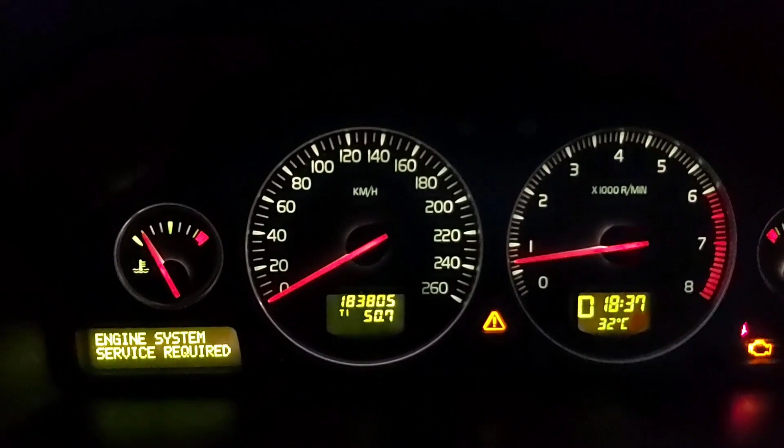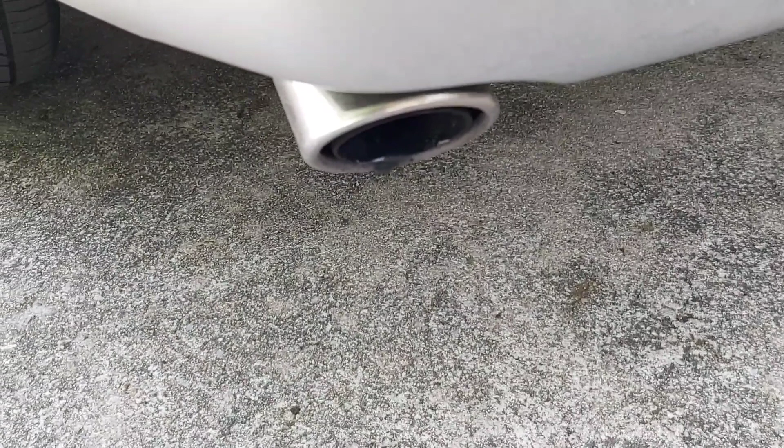Okay, so a new symptom: cold. When you put the car in drive, it's now surging. You can hear it doing it now - when it goes, you can hear a solenoid click. I don't know if it's a cold start issue or not, but if it does it again, wait and see. You hear a click and then it'll hunt really bad, very audible. Boom, boom. There.

Hey guys, on today's episode of Thailand Retro Mods, we're dyno tuning the Moose Wagon. Time for a tune, time to see if we can unlock some power. This episode we're going to walk you through the diagnostic process we undertook, and why we're going for a tune already - we're kind of jumping ahead of ourselves, but there's a good reason. We've checked out a few other things. We've got a tune from Hilton in the USA, so we're going to go over that tune and the process. First, we're taking it to the dyno cell to get a baseline run, to see what it's currently putting down before we upload the tune, and see how much more moose we can unlock out of this thing.

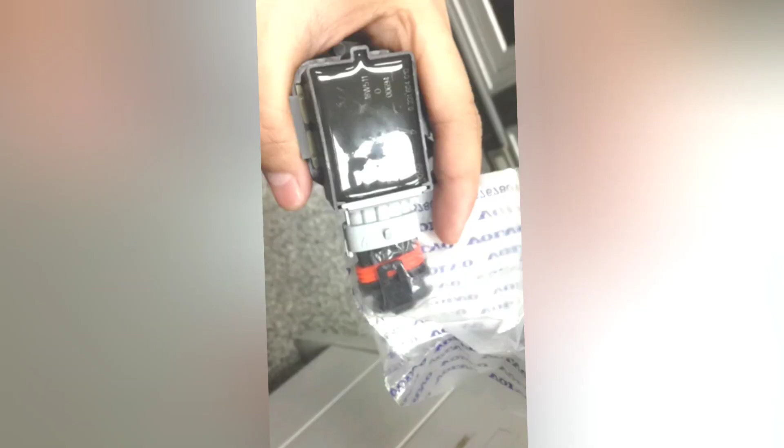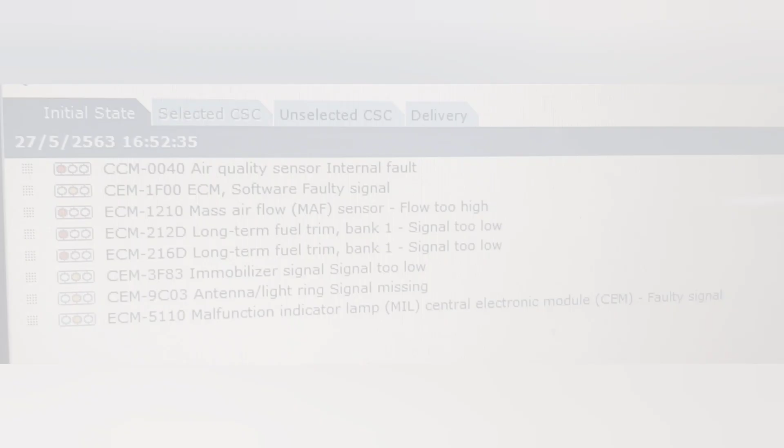Okay, so at this stage I've bought the car. We've done a lot of stuff to it - changed the timing belt, changed the coils, changed the plugs, changed the plug connectors, even changed the MAF, and changed the oil and everything. We're getting it ready, but the problem is the car just does not behave right. It's got some pretty significant symptoms. It feels very underpowered, the gearbox just isn't happy, it doesn't want to change gears. I thought it was the oil, but it's not the oil. Under wide open throttle, it gets up to redline, it goes up, up, up, up, up, up, before it changes gears. It's just behaving like a general dog.

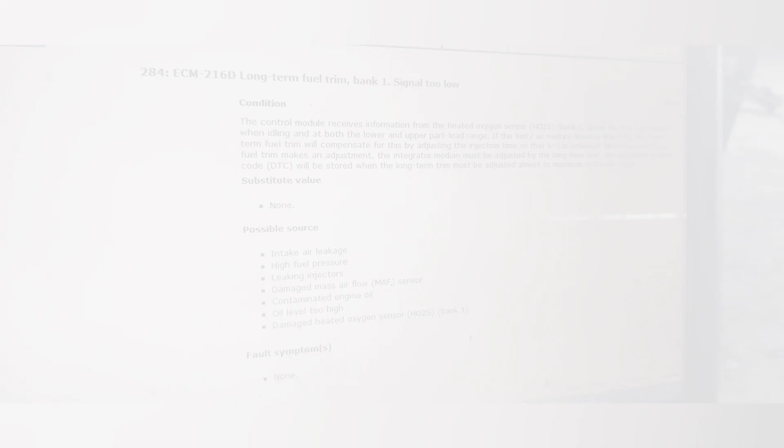The symptoms we've got in the car showing us is a long-term fuel trim, which is typical of a vacuum or air leak behind the MAF. It's also showing us a MAF error itself, and it's showing us an ECU error too, which means it's had a tune before - so that's interesting.

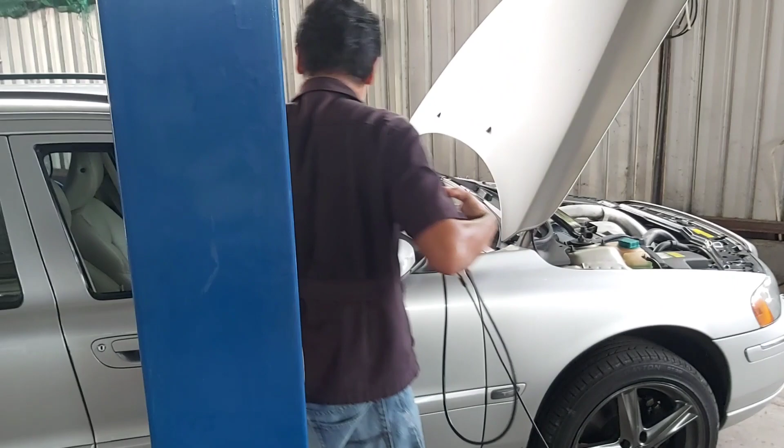And so we picked the video back up at the workshop, and now you get to see the troubleshooting process. Noom is such a legend - he's actually gone and downloaded the VIDA software in English for me so that I can read the codes as well.

So yeah, we were getting all the codes up, but there was a lot of garbled text on the screen - unfortunately my spoken Thai is not even as bad as my reading and writing of Thai, so thank God he's got it in English, so we're going to see what it is.

The problem presenting at the moment could just be a bad board - the body control module talking to the ECU. What we've found is it seems to be an intermittent fault, which is kind of positive, because that could mean it's a connector or something on the board that can be replaced and fixed - so that could be good.

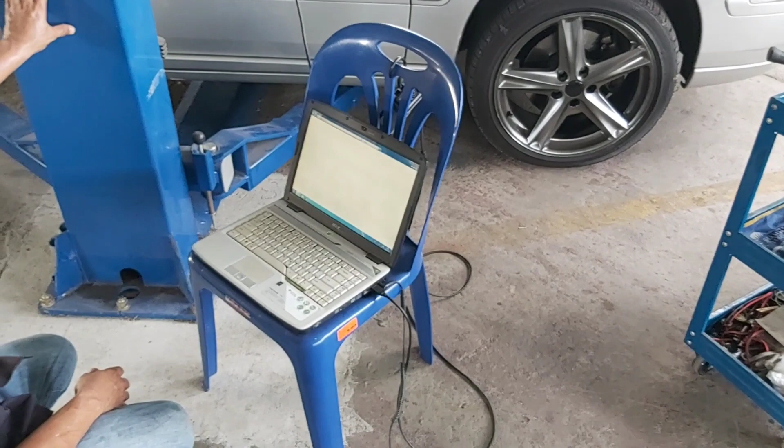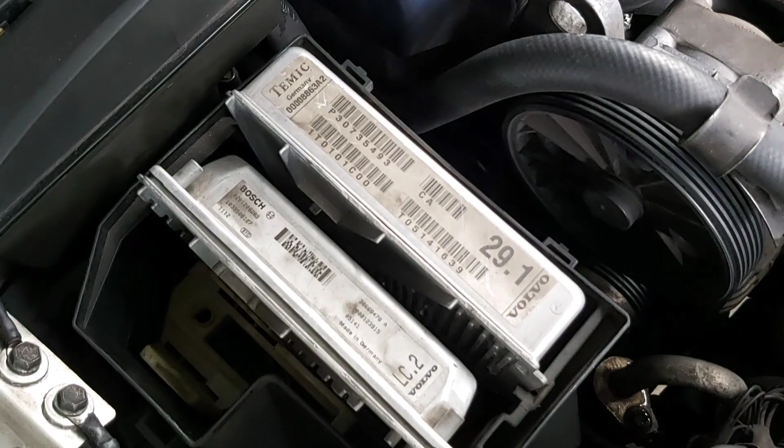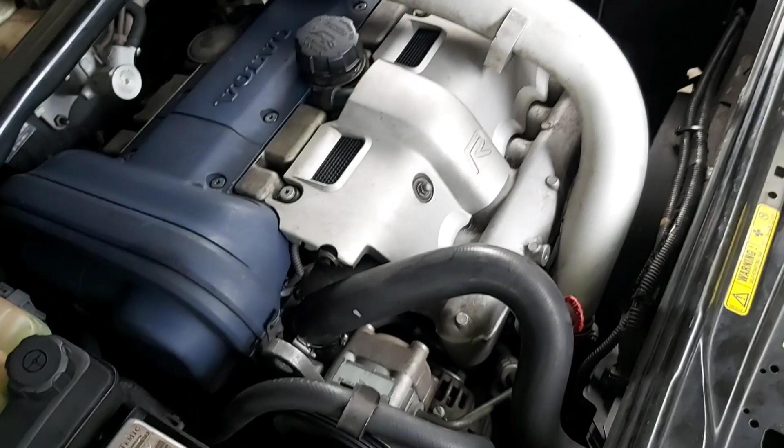The ultimate bad news would be that there's a disconnect between the ECU for the car - so the ECU in the car here. We've got the V70R engine, which is what we want, and the ECU which obviously runs that. We've got the original ECU for the shitty automatic gearbox, which could be causing problems. And then it runs into the BCU, which is under the dashboard, which then goes out and controls all the other stuff like the ABS and all that.

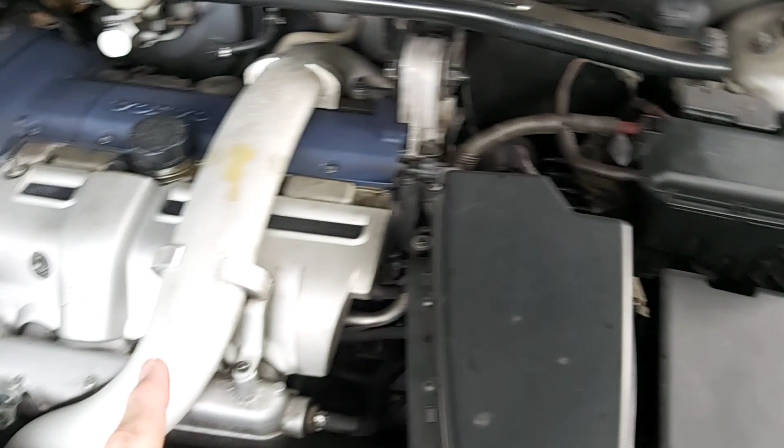The worst case scenario for this car is that it's going to be like an ABS-type fault, where this engine, that computer, the gearbox - they just don't talk to each other and are never gonna talk to each other without special VIN numbers or whatever from Volvo. If that's the case, then we're up the creek without a paddle. So fingers crossed at this moment that it all comes together.

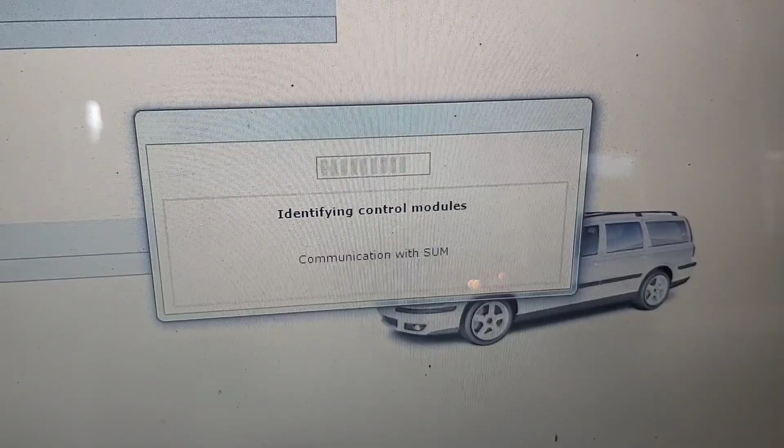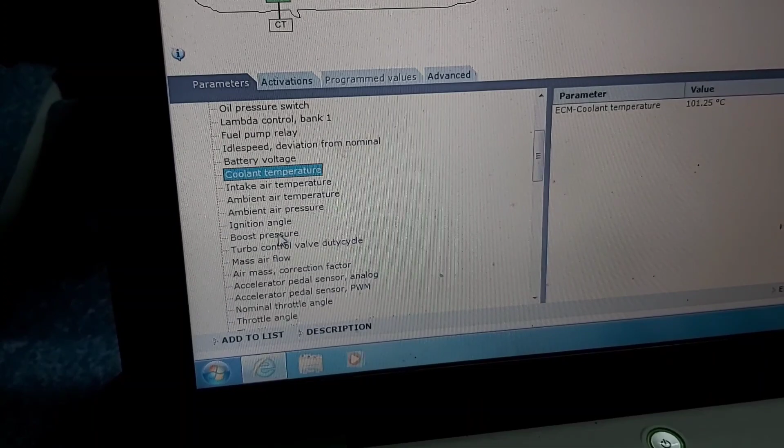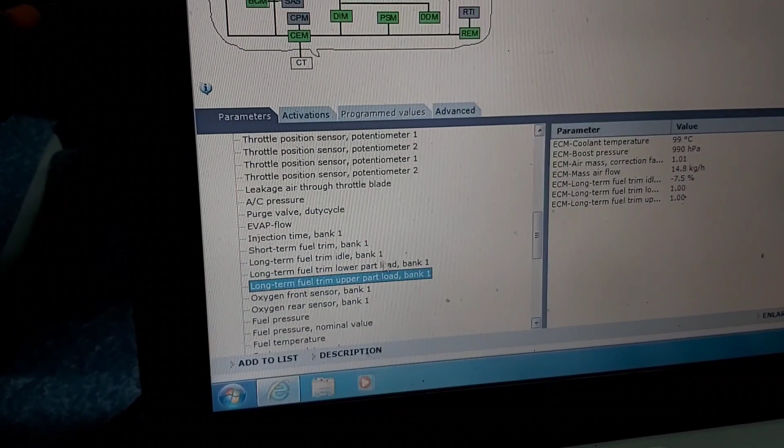So the cool thing about the VIDA software is you can go in and select parameters you want: coolant temperature, boost pressure, whatever you need, airflow mass correction, mass airflow we definitely want. We also want to throw in the long-term fuel trim, lower part, long-term fuel trim upper part load. That's one of the main ones we want. I was also worrying about the fuel pressure, because it could be the fuel pressure sensor as well, and this will give us all the immediate readings.

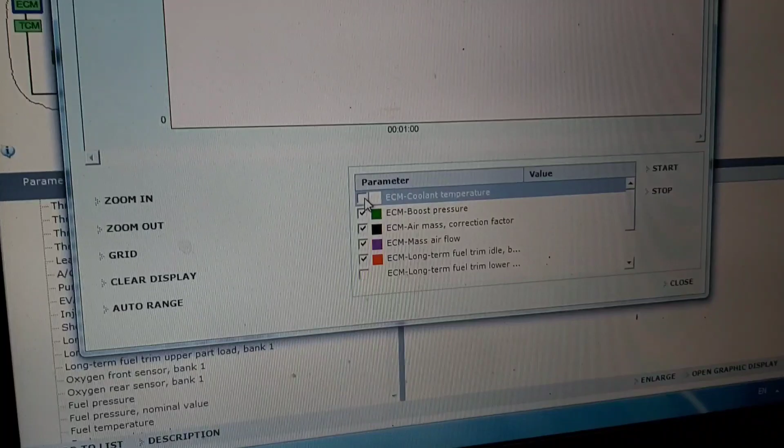Then you can actually go to open graphic display. You can pick 5 of the parameters. In this case, we're going to want to select the mass airflow, the long-term fuel trims are the main things we want because those are what were coming up with the errors, and the oxygen sensor. We can only pick 5, so we'll pick the front, the rear, and that. So start there, and then as you see, it starts to give you the live readings.

So the oxygen sensor is one of the ones that we were worrying about. Fuel trim seems pretty good now. I've noticed that the long-term fuel trim has gone back to -7.5, which is the maximum down, which is what we don't want to see. So there could still be some fuel trimming issues going on there.

A little bit of slack cable.

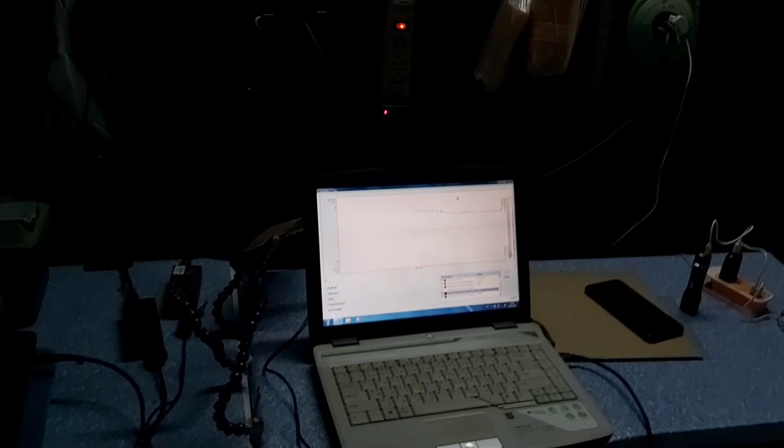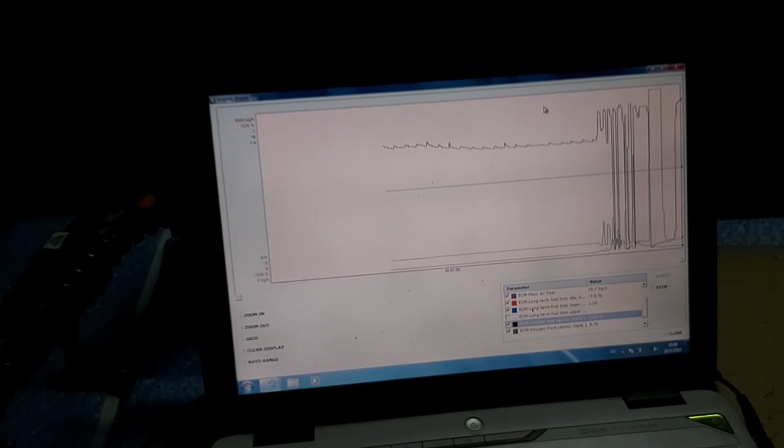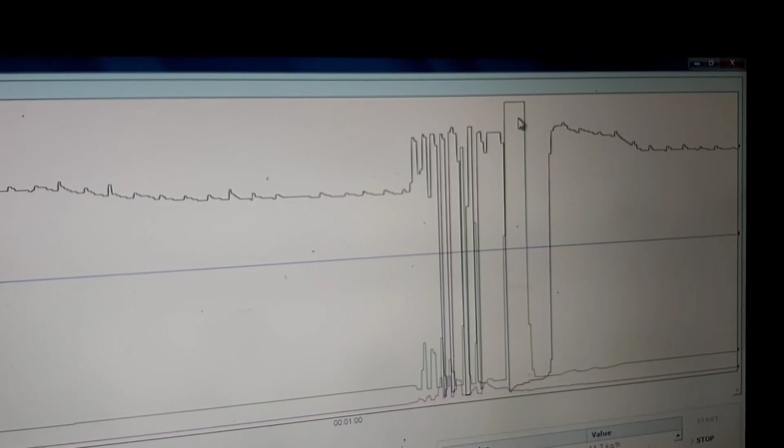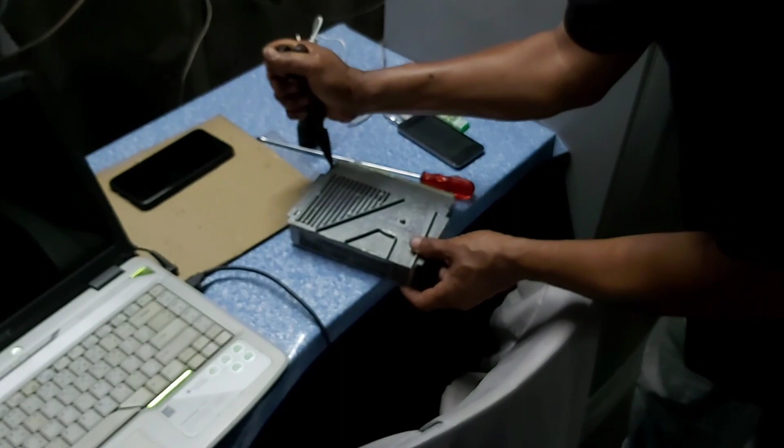Now, the last departing gift that the workshop in Bangkok left me with was going, something wrong with your gearbox, and it's probably going to be very expensive to fix. So Kun Noom, this is his wheelhouse for sure. He's got all the setup and everything for it, definitely knows what he's doing. So he's going to have a look at the transistors for me and see if he can get them fixed, because this could also be another one of the problems.

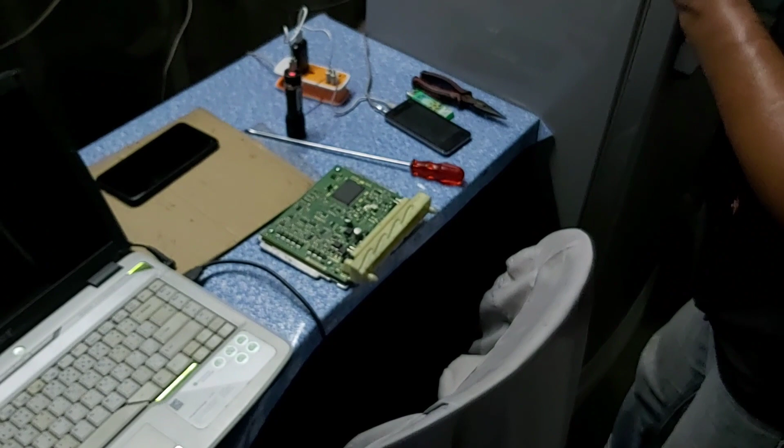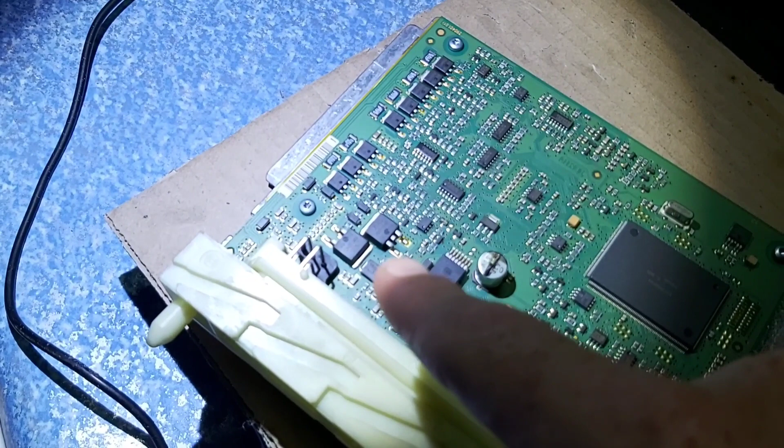I noticed under full load, wide open throttle, it was not wanting to change gear either. I'm sure this gearbox isn't long for the world, but let's see if we can give it a decent send-off at least. So there are a couple modules here which we can get the part numbers from and order. Thailand being a very hot and humid country, these might have just gotten hot inside the engine bay and cooked, so we're going to have a crack at seeing if we can order these and replace them. So we've found the part numbers for the 2 transistors there, and we're going to order some on eBay and then chuck them out and chuck them in and see if we'll fix the problem.

Now, just got back from the mechanics and my car's making this funny squeak. Can anyone else hear that? So I found my mystery squeak in the car. That'll do it every time.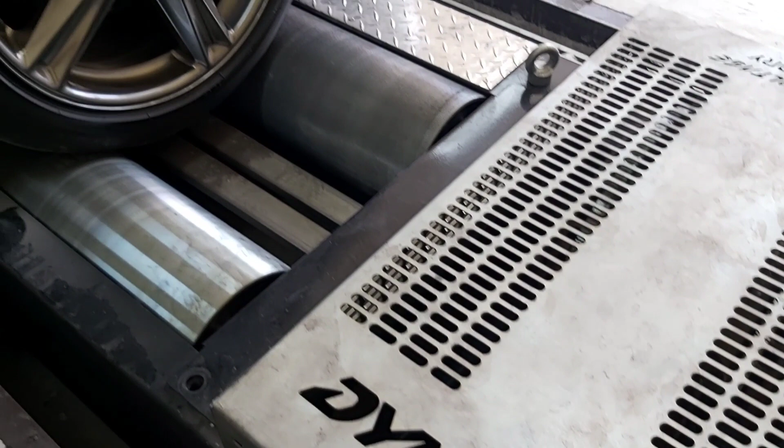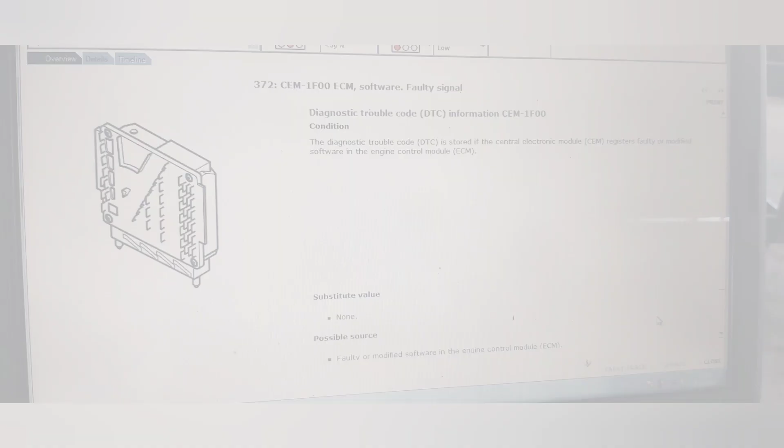So the next step for the car would have been to get some new transistors for the TCU, the transmission control unit, because Noom thought that a lot of the gearbox problems were actually coming from a bung transistor on there. And then it kept on coming back to me, the fact that the computer was showing up with an error that the software had been edited. So that told me the computer had already had a tune. And I sort of start to think to myself more and more, could it actually be the tune that was causing all the problems? Could it have been the tune that's causing all the fuel trim problems? Could it be the tune that's causing all the problems with the AFM, with the gearbox and everything?

So after having a chat with Hilton, who is a famous tuner in America, he came back to me saying he feels there could be a lot of benefit from a tune, and so I bought a tune from him, and this is what's happened next, guys, so enjoy.

Screen over here just going crazy with numbers as the fuel delivery happens, acceleration happens.

So we're getting the car dyno tuned at Chat Up. So how did I find this place? Literally got onto Google, typed in dyno, car dyno, looked at a few different other locations and looked at the photos. So looked for a location until I find a photo of an actual dyno cell, and lo and behold, this place had it. It's probably about 10 minutes from our house.

We can have an hour on the dyno, and an hour on the dyno is going to cost us 2,500 baht, which is this much money. So this is the main shop, and the dyno cell is just over in the building next door.

They've got some cool stuff here, so let's have a look at what they've got. So one of the things that's capturing our attention is this random Honda. If you know what this is, playing at home, let us know. So it's a two-door Honda job here with a big wide body kit, so that's pretty cool.

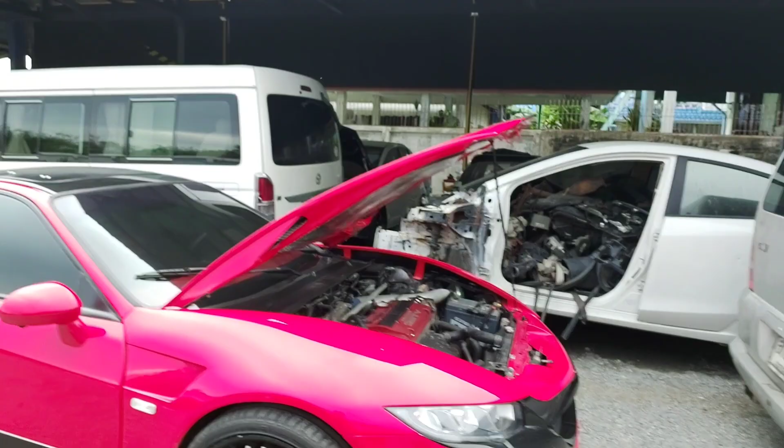Yeah, we'll have a bit of that. And also another one you might like is the Kombi. Thailand loves Kombi vans. I think most of the world loves Kombi vans, so that's pretty cool.

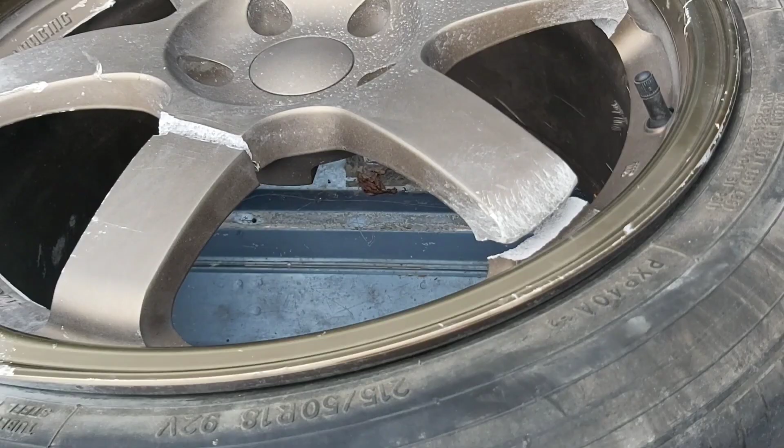So the things you find in Thailand, guys. This is the place we're going. That China quality, love it. And you'll notice most of the utes in Thailand, them Kirkis mate, gotta have the Kirkis, it's all about the lightweight.

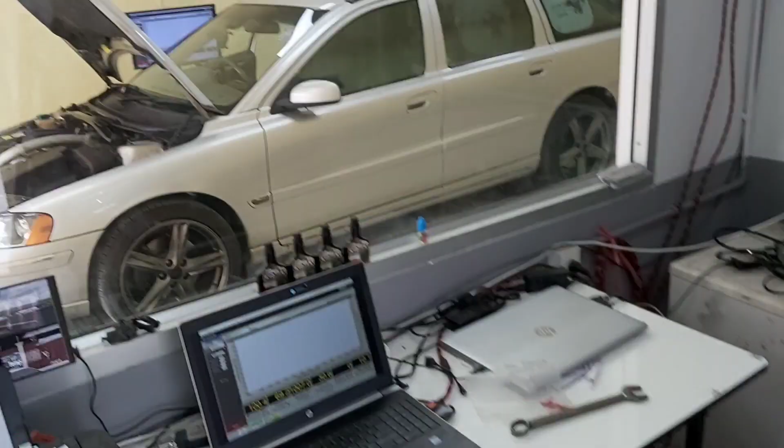I'm guessing 235. Hey guys, so the process we're going to go through today should be pretty simple. We're going to do a baseline pull just to see what's going on with the car at the moment, and to be honest, just for our pure interest to see how much power it's making. Then what we do is upload the tune via software that Hilton have provided that comes with the tune. It seems pretty much locked off, so it's literally just you log in, get your key for your tune, they let you have that one tune, and the cool thing is you don't need a hard uploader, so no prongs attached to the ECU that's going to be flashing it, so you don't run the risk of bad connections frying your ECU. It's literally just uploaded via the DICE controller, which is typically the inbound data stream for when you're measuring the engine. We can soft upload the tune through that, and then it should be done. Let the car idle for a bit, send the idle data off to Hilton, then take it for a drive, see how it's behaving, and then chuck it back on the rollers and see how many more moose powers we've gotten at the front hooves. Hopefully we've got...

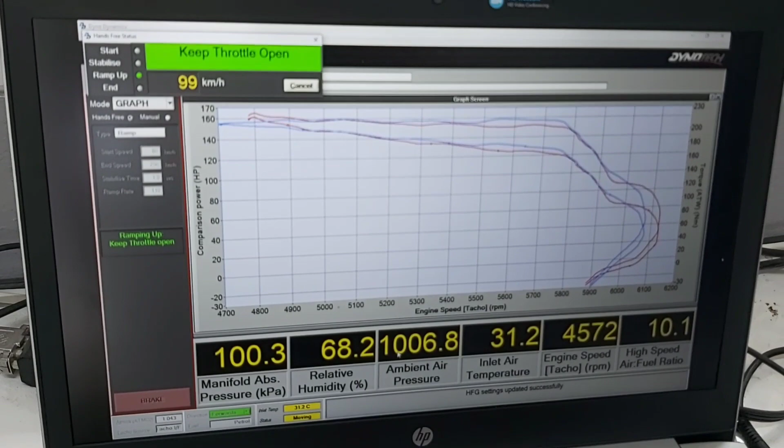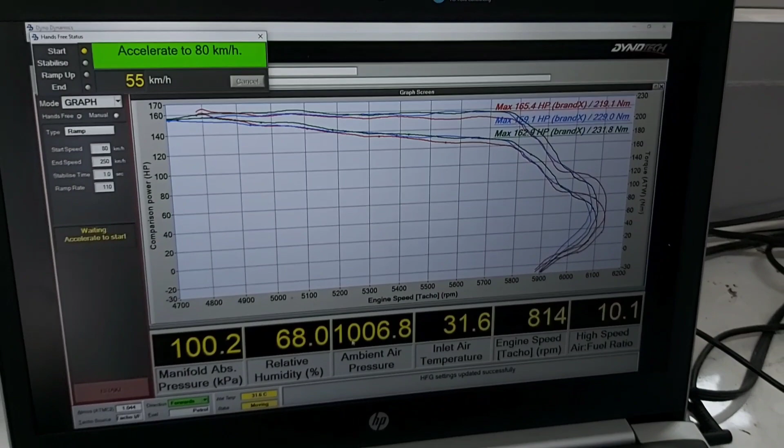So we're maxing out at 6,000 RPM as well, so we'll see what we can get. Currently 162 to 165 front wheel horsepower.

Okay, so we've got the DICE unit hooked up in the car, and the first thing we want to do is read the existing tune, so that takes a little while. 7% complete, so when that's done we should be good to go. Once you've hit 100%, you can then select your flash from the unit. So there's the original file up the top. This is our stage 3 tune, and flash.

Okay, and then we're beginning the flash. So this should be what we're looking for. Load this up and Bob's your uncle, Ron's your relation, you've unloaded all the moose powers.

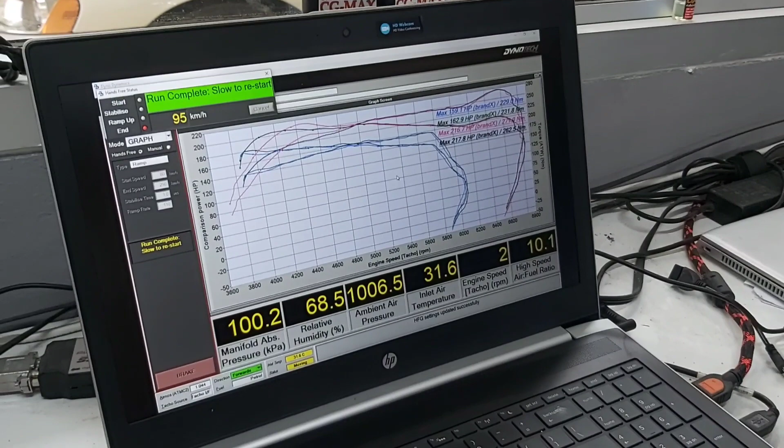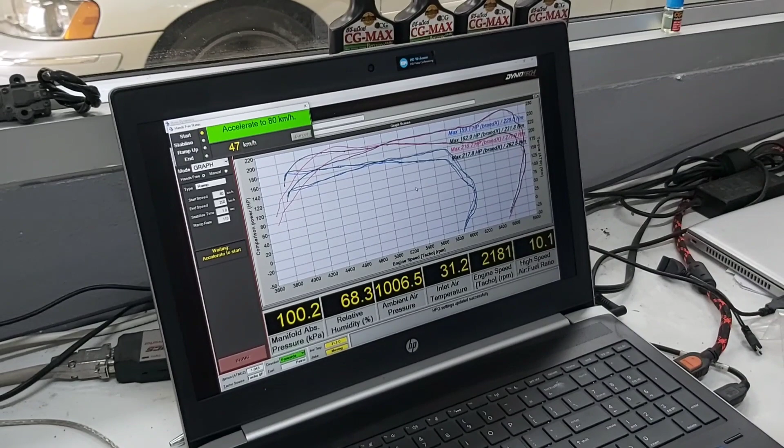So 216. Okay, so I picked up an extra 1,000 RPM and plenty of horsepower. So she's now at 217 from a low of 259 - 159, sorry. Decent uptake. It's a good base place to start, and hopefully the gearbox is changing well as well, and we've cleared off a lot of the gremlins out of it. So definitely happy with that as a base, and we can start modifying from here.

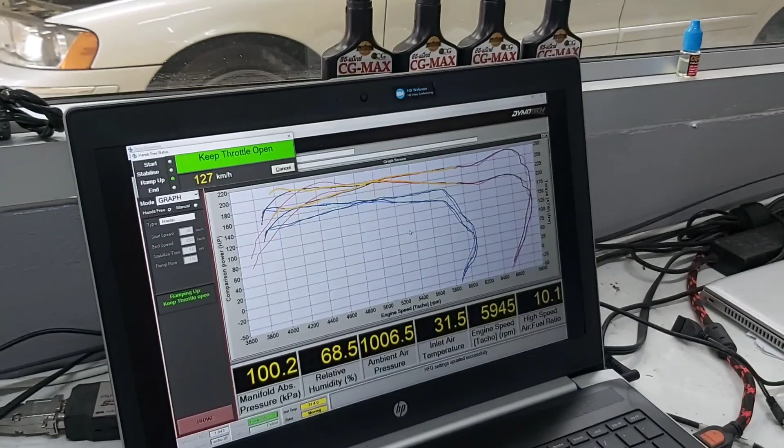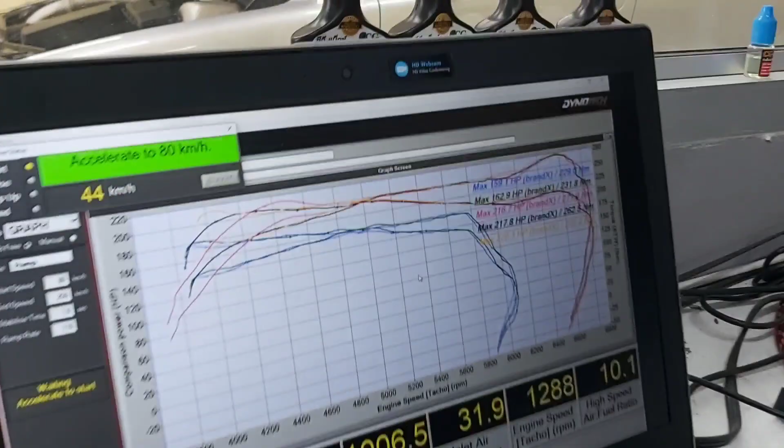What do we got? Give us them mooses. Release the meese. 220, so yep, max of 217, sorry. So 159 to 217, yep, decent.

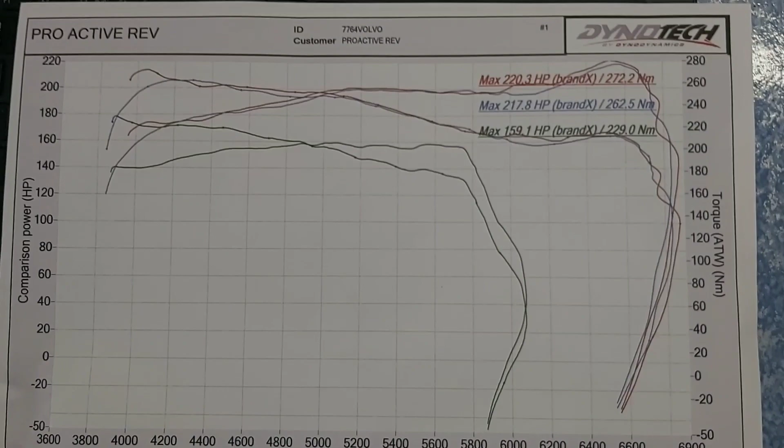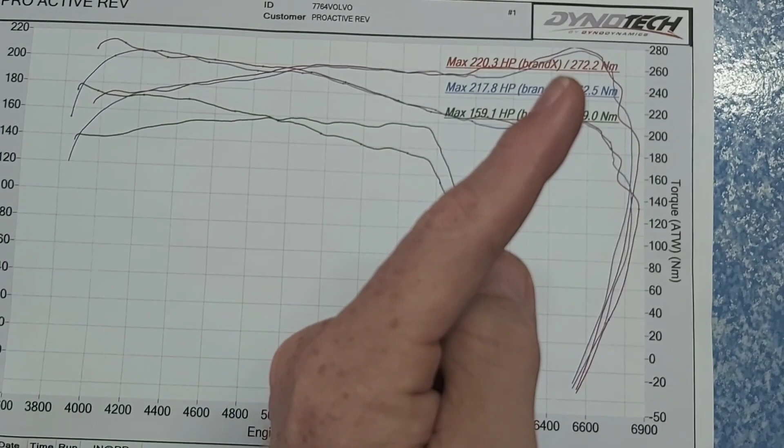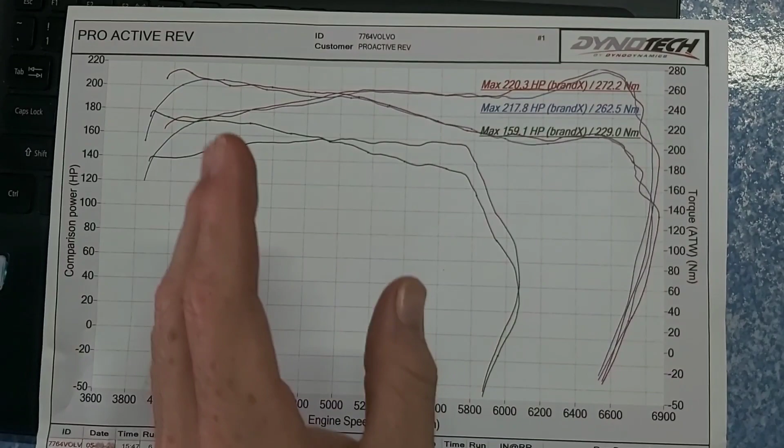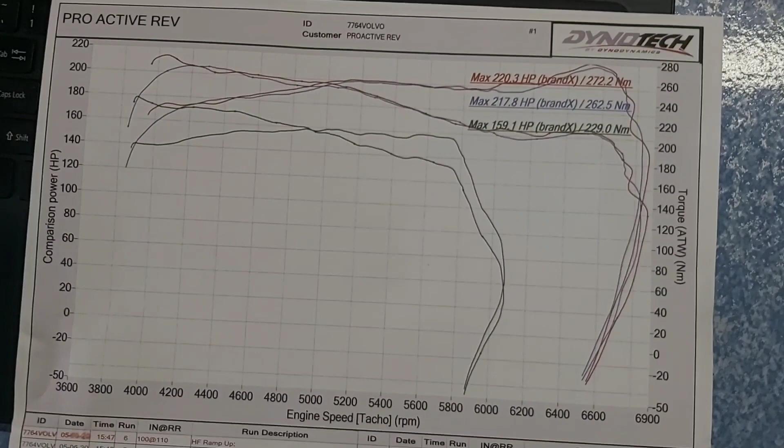Okay guys, so these are the official figures. When we got the car in there, it was making 159.1 horsepower, but as you can see here, it was dropping right off, and the rev limiter was set at say 6100, and you can see from the graph that it's dropping off quite a bit all down there, it's just dying. Now you can see, this is tune 3 where we're sitting now - when the VVT kicks in at about 6400 RPM, big spike, peaking out at 6500 RPM, making a solid 220. Another thing I've got to say is the dyno was completely untuned, so it didn't have all the ramping and everything set up. So this graph is really just to get an idea of A and B, it's an A/B test, not really showing the dyno queen figures you might get out of tuned dynos, but the fact that we haven't even started leaning on this car now, this is just where we're starting. Couldn't be happier, and Kundum, you happy with that? Yes. Yep, so Kundum's happy. He was a bit surprised about this as well.

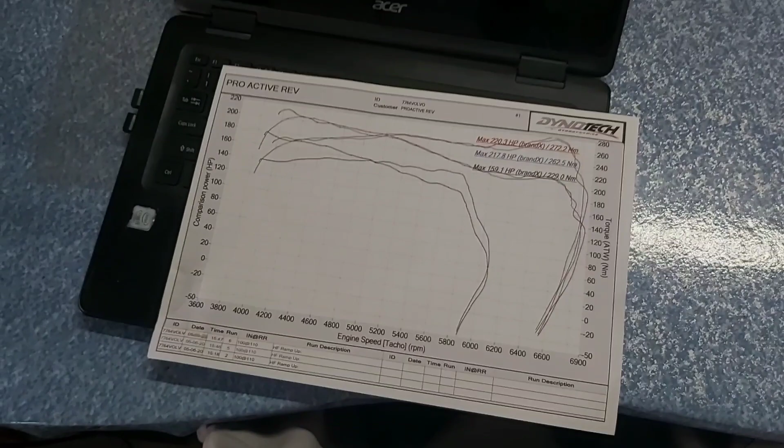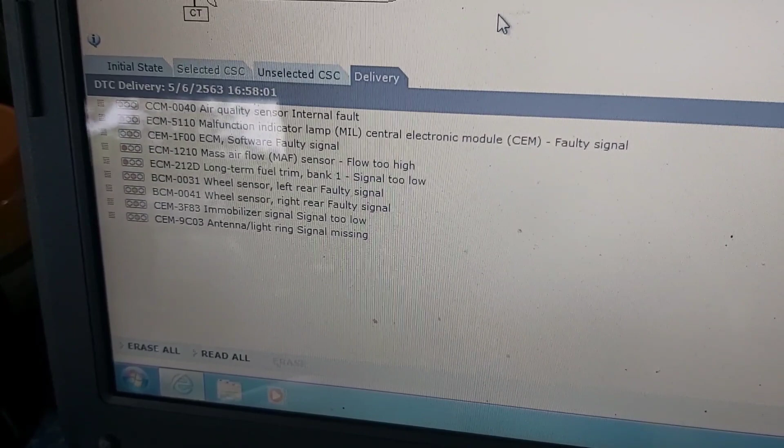These are all the things that Hilton said he'll adjust. So we've done a data log with his software, which we'll send off to him, and then he can adjust, remap, and update the tune as we go along and get all the moose power out of this thing.

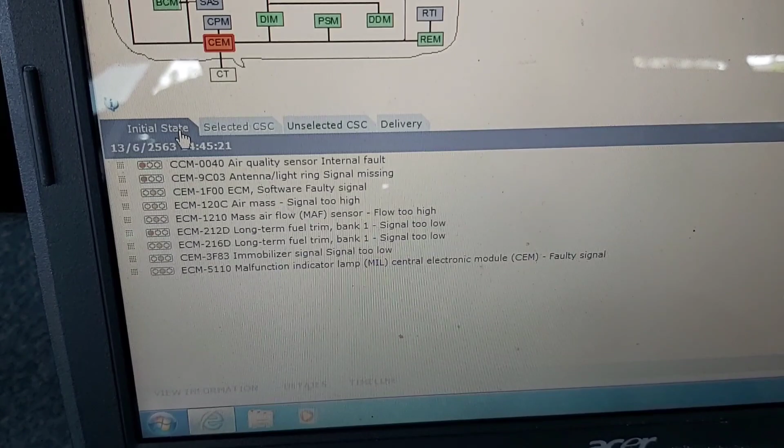Just another helpful hint - if you're looking for faults and wondering why you're not getting all the current data, or the faults showing on your computer aren't showing up here, you need to be in delivery mode, not initial state. So always make sure you go to delivery, not initial state, guys.

Okay guys, so I've just taken the car for its first drive, and I must say it is a different vehicle altogether. When we show you the dyno graph, you'll see that it picked up an extra 1500 RPM, which goes to show my initial thoughts were correct - that this car has never had the proper tune built up.

So the car has an ECU, a TCU, and then the BCM, the body control module. What was going on was that all the different parts of the car just weren't talking to each other. You've got a tune which needs to be built up off the 2-litre tune, and that's why all the MAF sensor readings and everything were out of whack, because the car didn't really know what it was. Now it knows what it is, and yep, happy days.

Couldn't be better. Yeah, great result, guys. The price of the tune is something I wanted to talk about as well.

So I got that from Hilton because it's all factory - I ordered the Stage 1, which is for factory tuned engines. After purchasing the Stage 1 for $350, he politely and kindly informed me that Stage 1 wouldn't work for this car. The reason he gave me was that, for the aforementioned reasons, it's had an engine swap from the 2-litre to the 2.5.